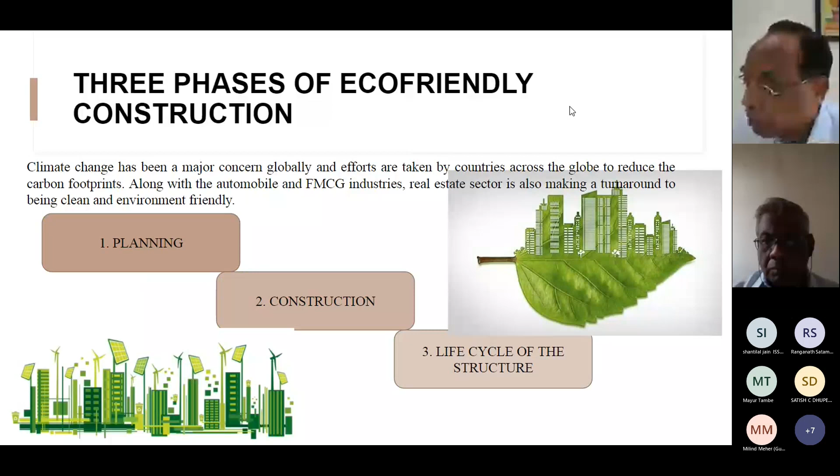So in planning, we can select the material to use recycled material from construction and demolition waste, like sand and aggregate. That way we can save fresh sand from the rivers and aggregate stone from mountains and hills.

And then to reuse material in situ. If we do any construction of road, we go for digging and all these things. So we should not throw that material to the dumping ground; it can be recycled in a proper way in situ. So we will save transportation and other environmental degradation, like noise pollution and air pollution.

And to use recycled wood for furniture and partitions. I'll give you the example of Navi Mumbai Municipal Corporation's head office, where we used recycled wood for all the furniture, partitions and doors. And to use volatile organic compound free paints. This will improve our indoor air quality. And to use double glazed glass for windows.

By using this type of glazed windows, we can provide insulation and reduce the temperature difference between outside and inside, which will reduce the load on air conditioning. And to use precast concrete wherever possible, like on the road, when we do construction, stone slabs, drains, so that on the road there will not be much concreting work. Our machines will not be brought on the road, so no air pollution, no noise pollution, and we will also save traffic congestion.

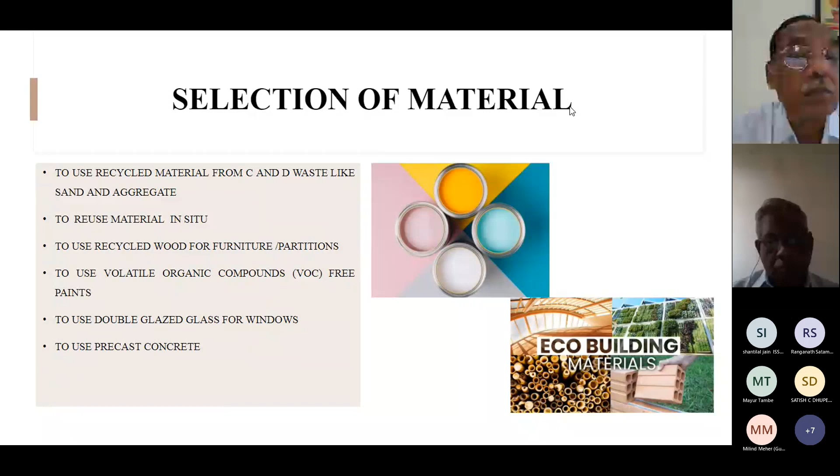So these things we incorporated. In planning of the structure, we can first go for orientation of the building. If we see the sun's path, wind directions and particularly the rain pattern, accordingly we can design and plan our buildings, so a lot of things can be saved, and we can use natural energy, natural sunlight and air circulation.

Then we should have rainwater harvesting. All the terrace water which goes on the floor and to the drain can be collected in a proper way and stored in underground tanks, which can be used for firefighting and other purposes. Then wastewater recycling. In this building, we have a wastewater recycling plant where all wastewater is recycled for gardening and flushing. And solid waste recycling: though it is an office building, so not much solid waste is generated, we have kitchen waste there.

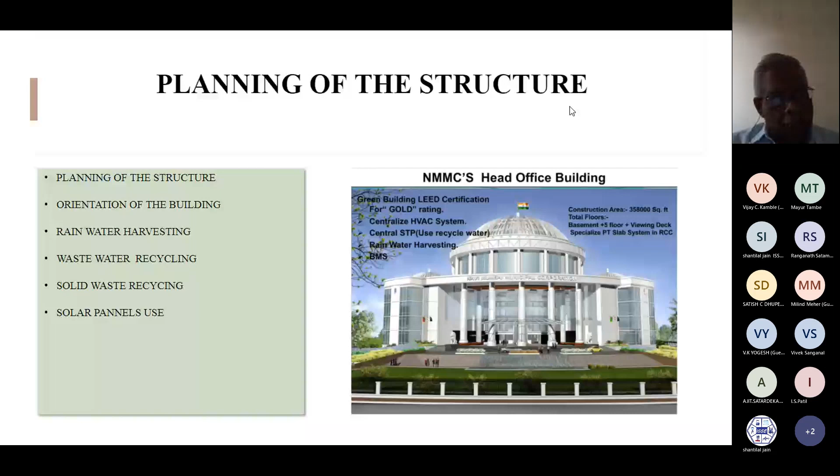Then in construction, to protect the surroundings from dust and noise, we should have proper cover. Like in Western countries or in America, we see that they drape all the buildings from outside with green cloth, or they have some different scenes also, so that it doesn't look like some construction is going on. The same picture of the building is there on the site. So from outside, you will see the same building, but this protects from the dust and noise of the building. So that is very necessary, because these airborne diseases and mental problems come through this noise and other problems.

And to reuse and recycle excavated material in situ. This can be done particularly in road construction work, where generally when we make some road, we excavate the above layers, and then new layers are put on the road as a base course and as a wearing course. But if we recycle the same grit, aggregate and sand there only, in situ, it will save a lot of our natural material, because that material is good for use.

And to use new alternative technology wherever possible, like in the coming slide I'll show you the micro surfacing I have done at Palm Beach Road, so I will explain there. And to minimize debris generation and transportation: if we go for new technology where we don't need to excavate and we don't need to transport debris to far away places, like in Mumbai, where it has to be taken 30-35 kilometers away, we can minimize this.

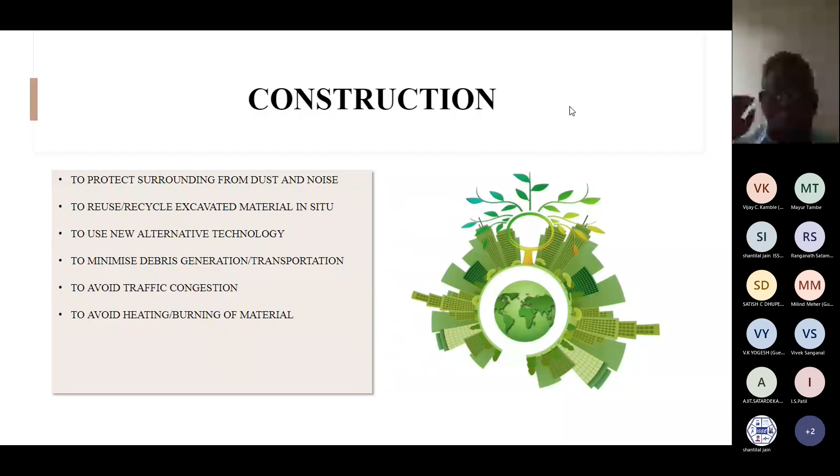So air pollution, traffic, noise and all these things we can minimize or combat, and avoid traffic congestion. If we adopt some new technology, we can decrease the time, so that traffic can be allowed within a few hours, which will save a lot of traffic congestion. And to avoid heating and burning of material, this also we can save by adopting new technologies, particularly in road construction. And that is main in all cities.

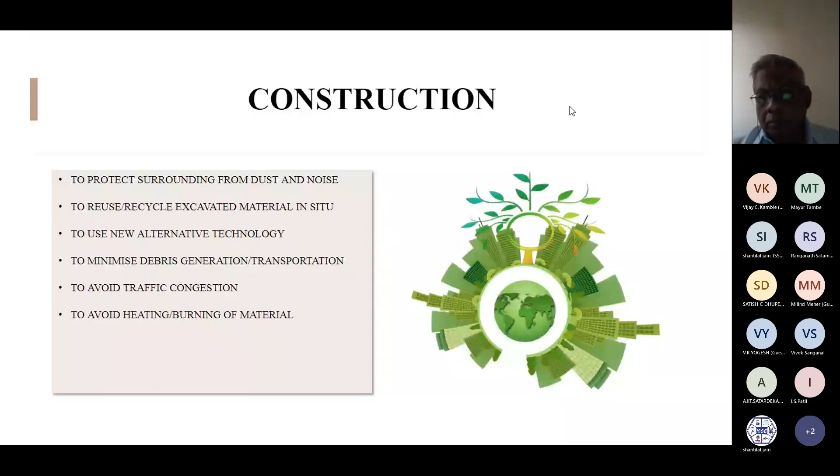That was during construction, and in the life cycle of the structure also, we can take some decisions where we can protect our environment by giving less solid waste or liquid waste to authorities. Now it has become mandatory in the DCR and in the Solid Waste Management Rules 2016 that big societies should have their own solid waste treatment plant and wastewater treatment plant, where we can treat the water, and the treated water can be used for flushing, gardening, floor washing, etc. So this responsibility will not go to the public authority, and we can save huge expenditure from the public exchequer.

And reuse and recycle: we can reuse and recycle so many things in construction, and use treated wastewater in our premises for secondary purposes to save drinking water. And use of solar panels to save energy: it can be used for area lighting and for water heating. These things we can have in our societies, commercial buildings, and hospitals particularly. We have done these things in the Navi Mumbai Municipal Corporation. In all our hospitals, we have used solar panels for water heating, where patients need hot water for bathing.

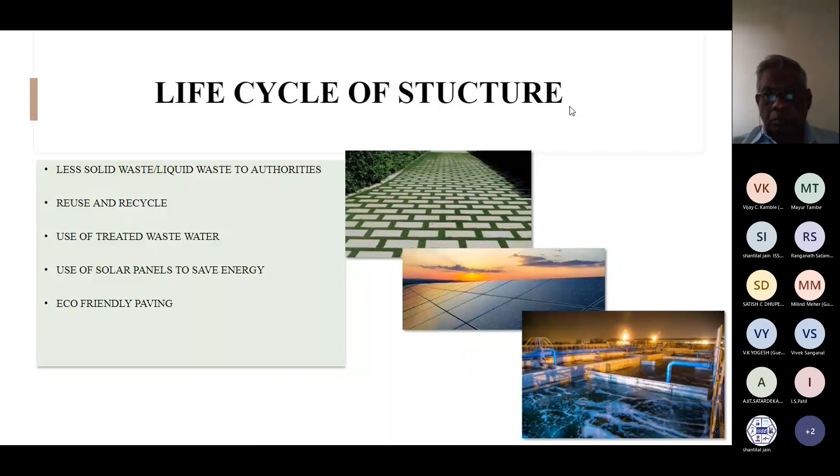And recycled product from C&D waste. Now, C&D waste has also become mandatory for all the corporations. So, from C&D waste, actually, we can make bricks, we can make concrete blocks, we can have tiles, we can use aggregate from C&D waste. So, it has now become mandatory that some 30% can be used, and in non-structural members, we can use all these things.

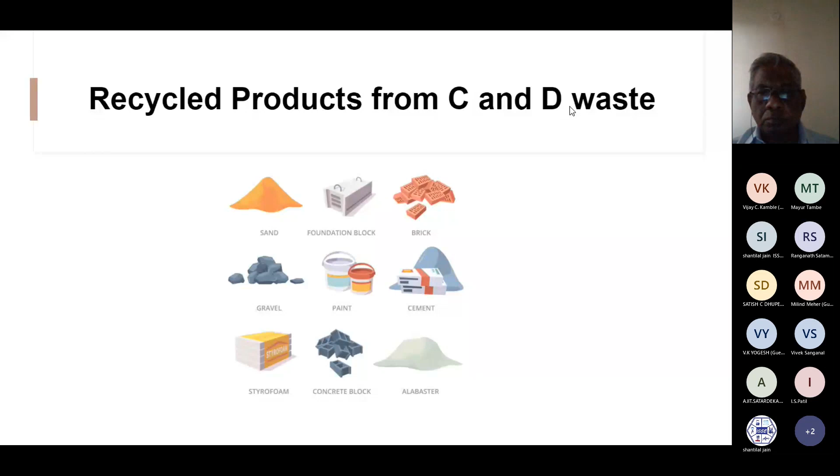And even for structural also, they have made it compulsory. And an IS code has also come up for this. So by doing this, we can save a lot of our rivers and our hills and our natural material. And everyone should practice this.

And as I was saying, eco-friendly alternative technologies, like this is the picture from Palm Beach Road. I think everyone who has been to Navi Mumbai knows Palm Beach Road. Here, actually, this road was constructed by CIDCO in the year 2000, and it was handed over to us. That time, in 2007, while handing over, I put a condition that you please treat its wearing surface, the top surface, then you hand over. So 14 crore went for this wearing coat and it was handed over to us.

And then in 2017, again this wearing coat had to be done. If we went for conventional practice, it would have cost us more than 25 crores that time. And then I came to know this new technology of micro surfacing. If your base course is good and intact, and only the question is the wearing coat, then with micro surfacing it requires only a thin layer over the existing one. It is put with pressure like a grout, and then it becomes a thin 5 millimeter layer over the existing surface.

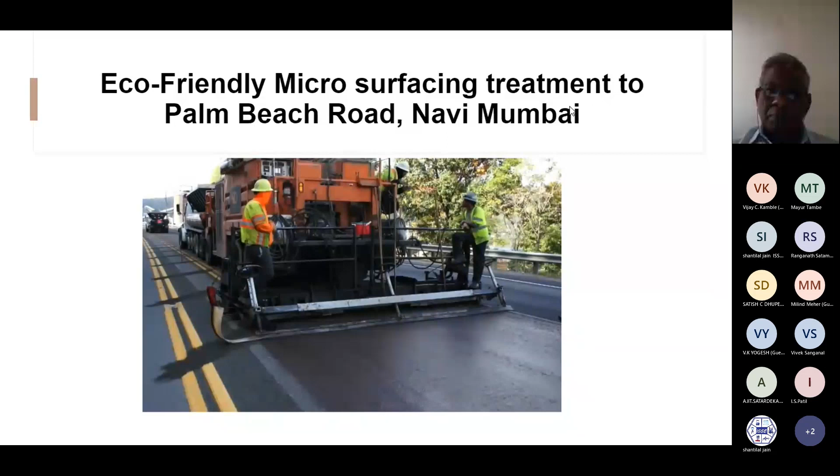And this technology is so good that the cost was just 7 crore for this 9 kilometer road, and the traditional cost was 25 to 30 crore. So we saved almost two thirds of the money. And this monsoon, it is 5 years now, and the road is still as it is. It looks as new as it was in 2017. So such type of technology, if we try, is good for the environment also.

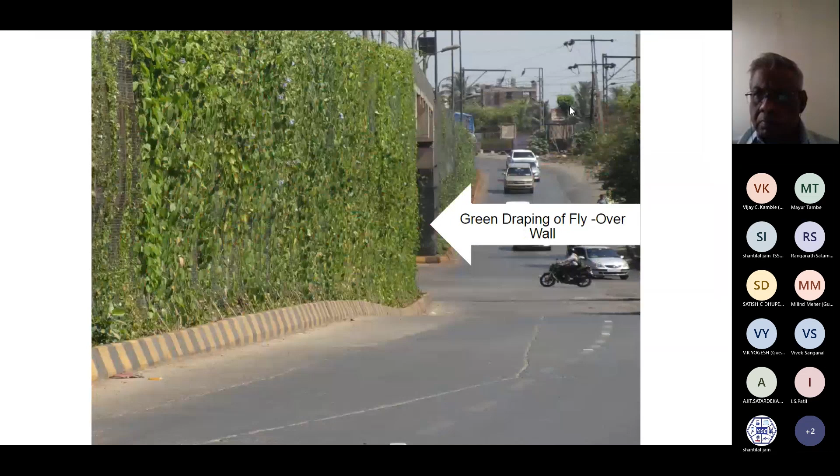And these are in the lifetime also. Like this is the Airoli bridge at the T junction on Thane Belapur road. There I draped it with greenery. I saw it in Singapore; everywhere they practice like this. All bridges and culverts, they drape with creepers. I did it, and it has been more than 10 years now, and it looks very pleasing. And moreover, these concrete surfaces emanate heat, so that is also saved. So it is also one of the ways we can minimize the carbon footprint, or heating of the surface.

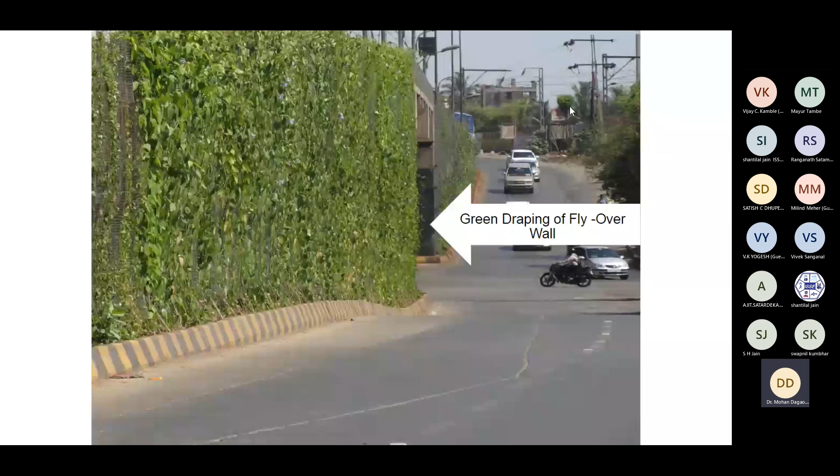Likewise, I also practiced it at one MBR we constructed on Parsik Hill. There, the surface was 35 meter by 35 meter, a totally concrete surface. So I made an entire garden there, a jogging track, and a balcony to view the panoramic view of the city. So that way also we can cover the surfaces with greenery. So these are some small things I did in my tenure, but I wanted to do more, and I'll be doing it whenever I get the chance.

And some recognition I got, like the Paryavaran Mitra Puraskar, was given to me by late Shri Manohar Parrikar ji, who was our defence minister. That time he was Goa chief minister.

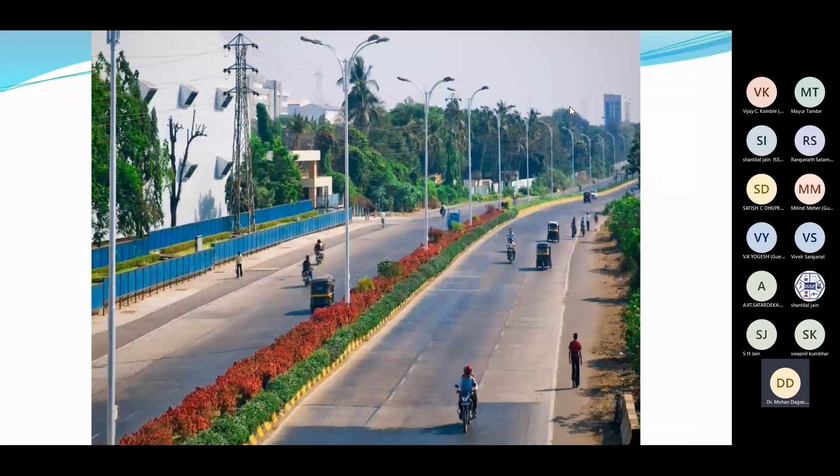So now the beautiful lecture has come to an end. So thank you very much, Dr. Dagaonkar sir, for this beautiful lecture, and you nicely explained the necessity of protection of this environment, because you are the person from environment, because you completed your MTech as well as your PhD in environment. So you very much take care of this environment.

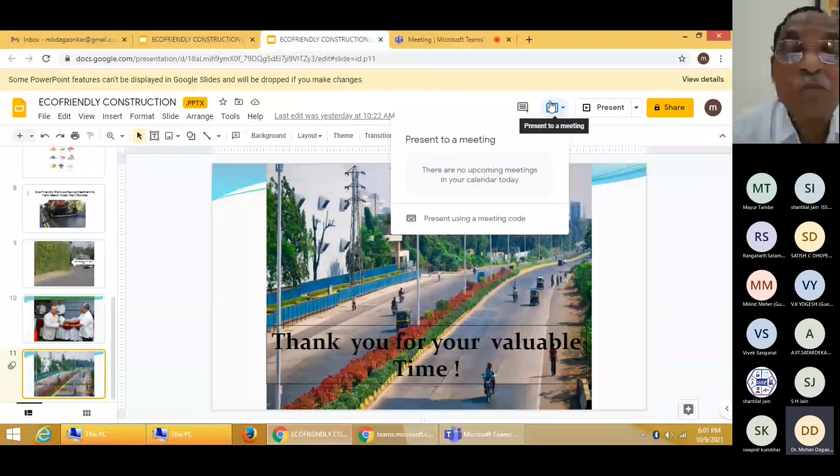You said that ecology is not only for the human being, but all the creatures of the nature also have an equal stake on this mother earth. So we should follow the nature's rules and do our development in a sustainable manner, so that development is also continued and the environment is also protected, so that the next generation will get the benefit of this nature.

You explained with your case study of the Navi Mumbai Municipal Corporation's headquarters, which right from the planning, construction, and after construction also, you provided the facilities such that environment protection is definitely maintained, and accordingly you got the gold rated building in IGBC norms.

Also, the example you gave was that the decision makers and administrators should think, they should be aware of what latest technologies are available in the market, and that should be used in our solutions to the various problems, like what you did for this Palm Beach road.

And you explained the importance of the 3 R's, that is reduce, reuse, and recycle. That is the main mantra of this environment to protect this mother earth, so that its benefit can be passed on to the next generation. So thank you very much, sir, for your beautiful lecture.